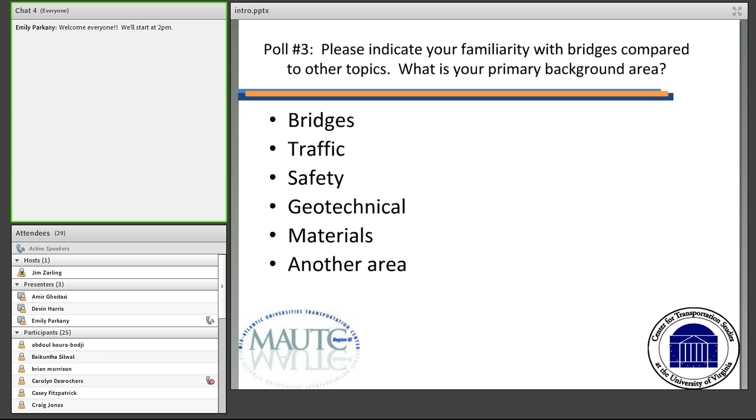And just one more poll. I am kind of curious on your familiarity with bridges compared to other topics, and sort of curious what your primary background area is, so that we get a feel for who's in the room here. Yeah, we're not quite seeing all of it.

All right, so we had to argue in our room which one to put down there. So it does look like most of us today are bridge engineers, so that's actually pretty helpful to know that people are speaking to the initiated, I guess I should say.

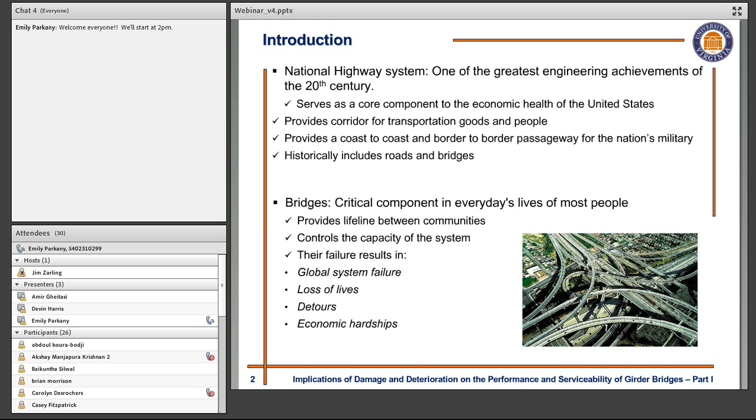In recent years, there's been a number of tragic failures that have brought bridges and the challenges associated with safety of these bridges to the national forefront of public scrutiny. Things like the I-35W collapse in Minnesota in 2007, the I-5 Skagit River Bridge collapse in 2013 from an impact, and then the M Bridge in Missouri in 2013 are some of these examples where we see these collapses, and then they make their way into the news, and people start getting concerned.

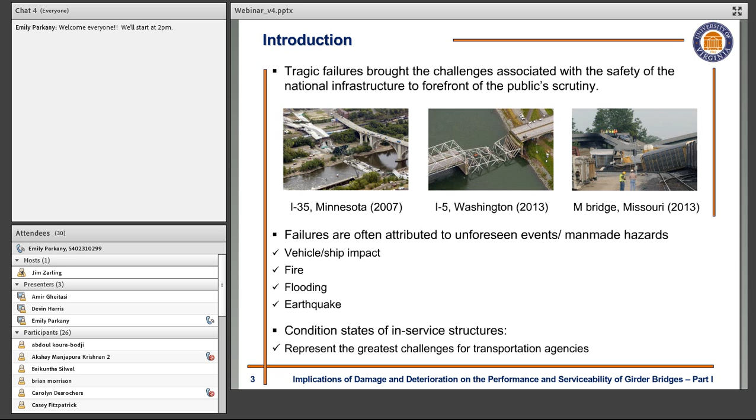The interesting thing about failures of bridges is they're often attributed to unforeseen events or man-made hazards, things like vehicle or ship impacts, fire, flooding, earthquake, and one that's really not even listed here would be something like scour. But the issue that we have in the transportation community is not really these one-off events. It's really condition states of these in-service structures. It really represents one of the greatest challenges that transportation agencies are dealing with. How do we maintain and preserve our existing infrastructure?

So according to the National Bridge Inventory, the latest database dump from 2013, we have more than 600,000 bridges in the National Bridge Inventory. This doesn't necessarily include some of the bridges that are less than 20 feet that are not part of that inventory, so it's actually even larger than that. Of this National Bridge Inventory, 10% of these are classified as structurally deficient, and 14% are classified as functionally obsolete.

In reality, these functionally obsolete ones are really more of a serviceability issue. There's low guardrails, inappropriate approach bends, things like that fall into that category. When we deal with the structurally deficient, these are the ones that really hone in on safety of the structure. And with all these structures, maintenance is a growing challenge for federal, state, and local governments. And it's really these routine structures, things like highway overpasses, short to medium span structures.

These structures suffer from various sources of in-service deterioration or degradation. And when we look at the infrastructure as a whole, transportation officials are behind in their ability to keep up with this maintenance. We're on this 2-year type cycle, and we're not ultimately able to repair everything at once. And in reality, it's not feasible to immediately repair everything anyway, both from an economic standpoint and a manpower standpoint.

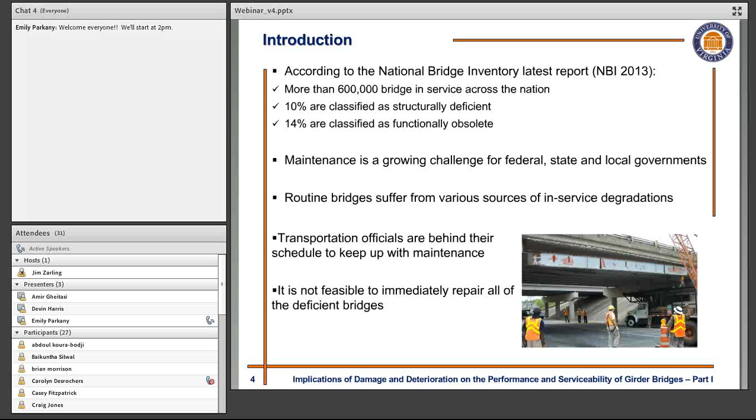So the premise of structural health monitoring has come into play, and it's been around for probably 10 to 15 years or so. This framework, structural health monitoring, is intended to evaluate the system performance. So you may have heard this four-level approach. Level 1 being detection of damage, level 2 being localization of the damage, 3 being estimation of the extent of the damage, and then 4 being the consequence of this damage. And basically this relates primarily to the structural safety and remaining life of the structure.

And as we go from level 1 to level 4, we see an increase in complexity in our ability to use this tool. And what this presentation really centers on is this level 4 part, really the consequence and the behavior of the system. As a result of structural health monitoring, there's been a number of new technologies developed to monitor in situ behavior of these structures. Things like fiber optic sensors, wireless sensors, non-contact measurements.

And what has been a challenge is that there's been some reservations with integration of structural health monitoring into standard practice. Part of this has been because of skepticism by transportation agencies for this framework. There's been issues related to the cost and the application of these technologies relative to the inventory. And one that's been presented very frequently is the potential for large amounts of data to come out of structural health monitoring frameworks.

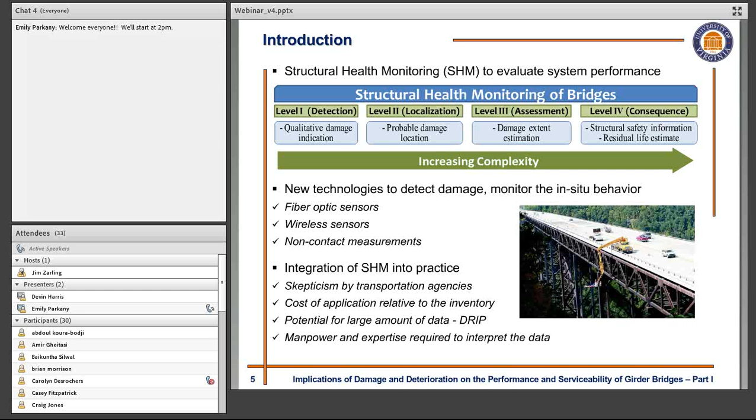And if you've heard the term DRIP, or data-rich information poor, this is kind of a common issue with structural health monitoring systems. The last one is the manpower and expertise required to interpret this data. So we're getting these large amounts of data. Ultimately, agencies do not want to have to employ a PhD in order to interpret the data sets. So we recognize that as a whole.

So before we get a little bit further on, we wanted to ask one question. What is your opinion on the concept of structural health monitoring for transportation applications? One is a tool that should be used more often. The other one is a tool that has limited application in the current environment. And three is undecided. You're undecided?

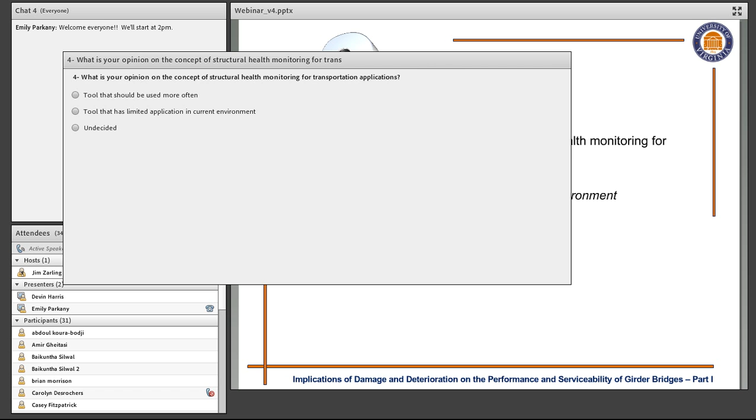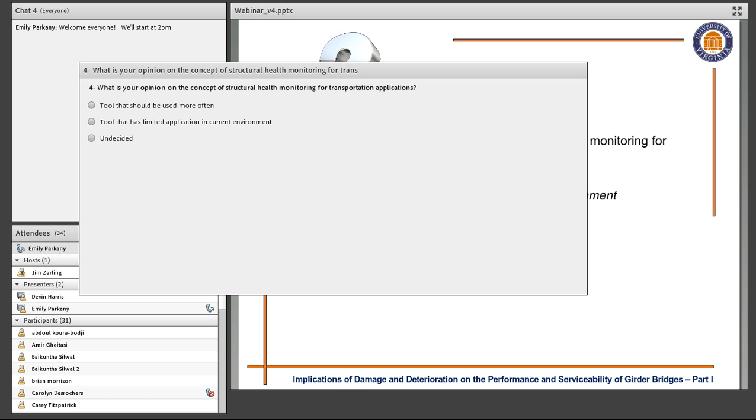All right, so it looks like we got almost a 50-30-11 split. We appreciate that feedback.

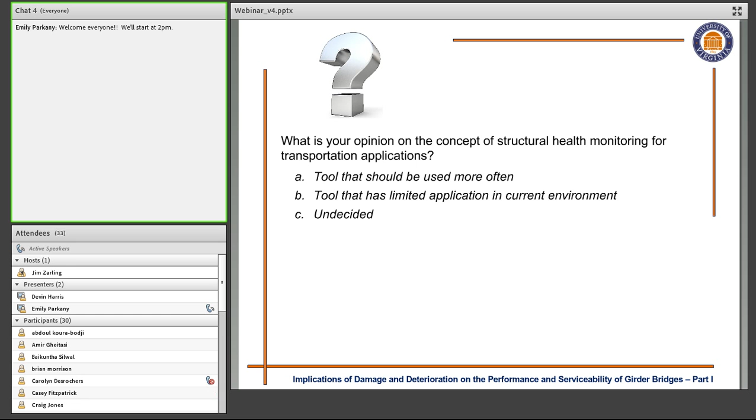So the challenge that we're addressing with this presentation is that, as I said, transportation agencies are lacking, in our opinion, a fundamental understanding of the influence of these damage mechanisms on the system performance. The question that comes out of this is how field inspection data, which is what we commonly collect, can be used to correlate the impact of existing damage scenarios on the performance of highway bridges.

So our goal in this project is ultimately to create a mechanism for integrating damage and deteriorating conditions into a measure of system performance. We're looking to make this framework applicable to routine superstructures rather than high-profile bridges like the Chesapeake Bay Bridge Tunnel, Mackinac Bridge, Golden Gate Bridge, which typically have constant ongoing maintenance. Another sub-goal would be to provide a linkage between design assumptions, maintenance, and behavior, which are typically uncoupled.

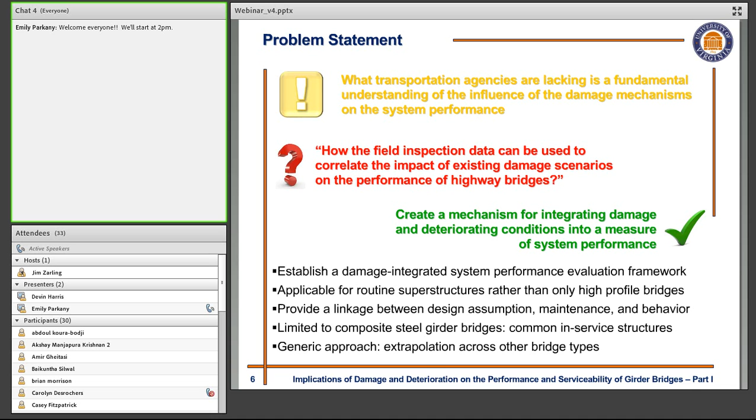In this study, we've limited it to steel girder bridges, which are one of the common types of structures that we see in service in the Commonwealth and pretty much throughout the United States. We believe that the approach is generic and should be able to be extrapolated to other types of structures fairly easily.

So the problem statement: when we're evaluating bridge system performance, we have a number of different approaches. One approach, we'll call it the ideal approach, is full-scale destructive testing of in-service structures with damage present. We could also limit this to a laboratory study where we do scale bridge models.

The challenge with these experimental approaches is that they're not really feasible in the current day and age. The primary reason is the associated costs with testing these types of structures. At the laboratory scale, there are issues associated with scaling and simulation of the actual boundary conditions and loading environment representative of an actual in-service structure.

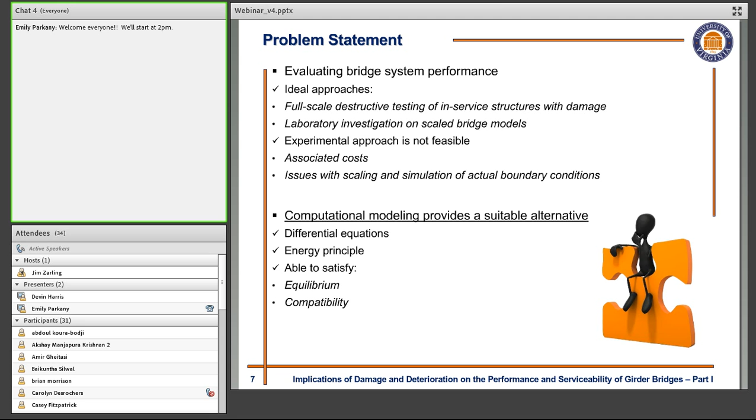That points us to a different approach, where we use computational modeling as an alternative. What we're trying to do is ultimately satisfy the differential equation of the system using energy principles and satisfy equilibrium and compatibility of the system. So computational modeling, in a nutshell, is mathematical models of the structure.

We have classical analytical models with closed form equations. These tend to be more applicable to simple structural components like beams, columns, frames, and typically are not able to represent complex structural systems like a bridge, where we have distribution behavior, composite action, and complex interactions of the various components.

In numerical models, we have an assemblage of discrete parts. It's a mathematical model in a different form, and we associate these models with approximate results. The complexity of the model is affected by the desirable level of accuracy. So if we develop really fine models, we'll tend to get better results.

Some common numerical modeling approaches, some older than others, include the grillage method, a planar grid model, frame analysis type approach, where we discretize the structure into a series of beams and transverse beams.

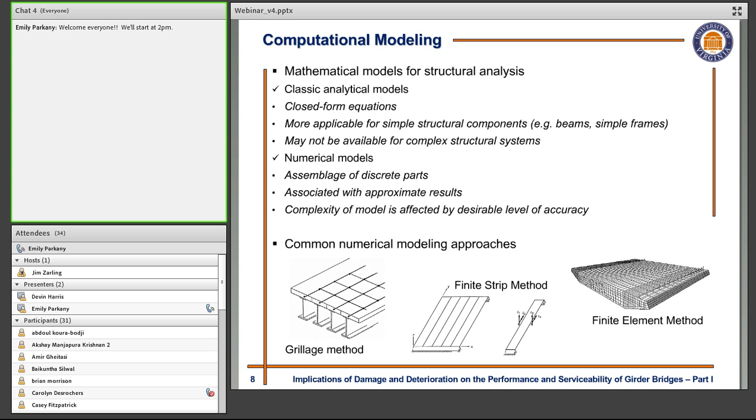Finite strip method, which is somewhat similar to the finite element method, where we're looking at a line element, and then the finite element method, which is what we're actually using in this study.

So before we continue, we're going to ask one more question here. How familiar are you with the finite element method? And answers being not familiar at all, familiar from school but no experience with application, I use this tool on an occasional basis, and I use this tool regularly.

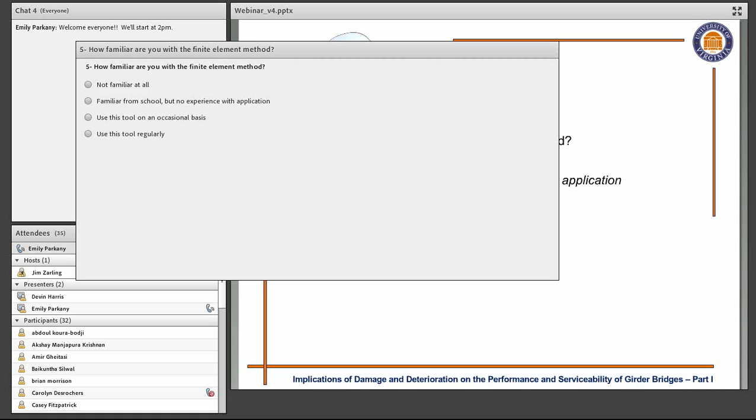That's good. That's pretty good distribution. I guess I'll go ahead and end this one. So the person, oops, okay. I guess the person who uses this regularly, we're probably going to try and hire you after this webinar. No, I'm kidding. We're going to move on.

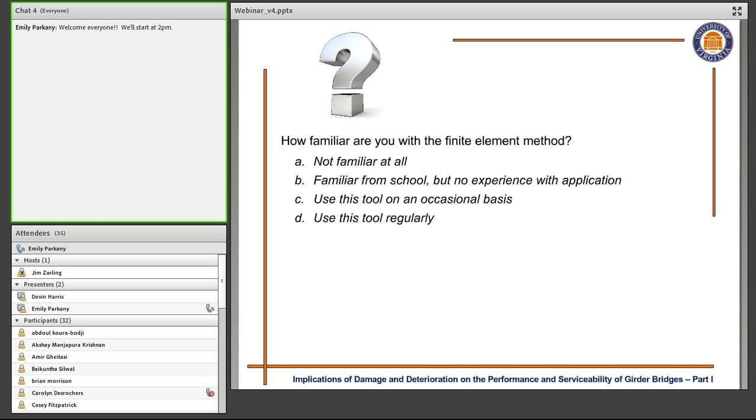Okay, so with the finite element method, for those who are not as familiar, it's a powerful tool common in engineering practice. There's a number of different packages out there. We use more of the complicated ones, ANSYS, Abaqus, which are typically commercial versions of the finite element solution. It allows us to model complex structural systems, include geometrical details, evaluate things like load structure interaction, and as it relates to this particular project, integrate existing damage.

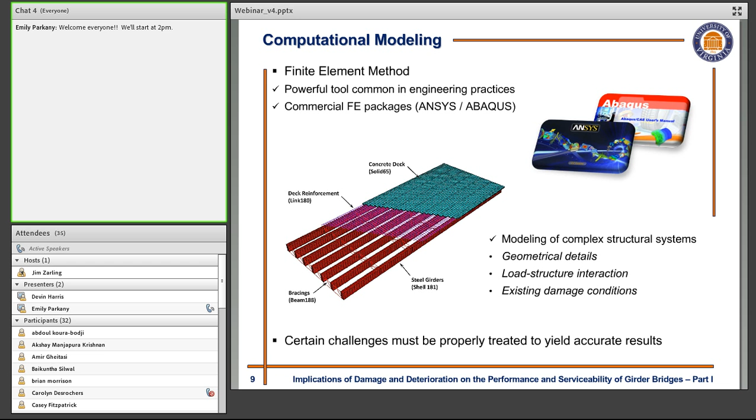And the challenge with this approach is that certain challenges must be properly treated to yield accurate results, and that's a very important thing. It's kind of the mindset of if you put garbage in, you get garbage out, and so it's actually very important that you try to model the actual phenomena that exist. So some of the modeling assumptions and simulation techniques that need to be considered have major impacts on the accuracy of results, including things like element selection, mesh generation, loading and boundary conditions are critical.

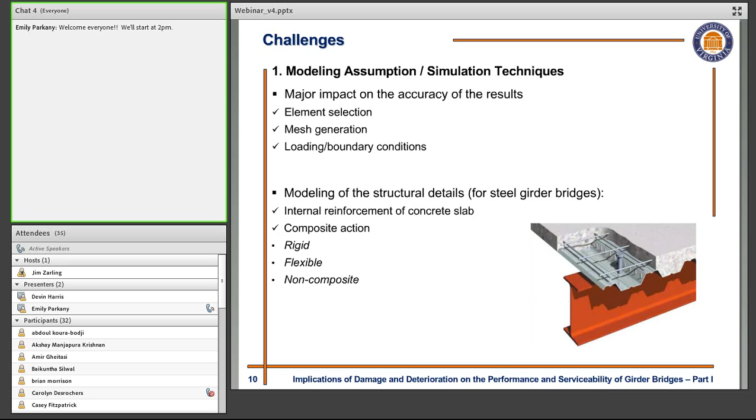For these bridge systems, we need to be careful and cognizant of modeling structural details, such as internal reinforcement of the concrete slab, composite action of the system, interaction between the deck and the girders. And then as we take these models into the full nonlinear range, which is kind of at the core of this project, it's essential to capture the failure characteristics and ultimate capacity of the system. So we need to pay attention specifically to the elastic and inelastic behavior of the materials, non-homogeneous and brittle nature of concrete, post-yielding and strain hardening of steel.

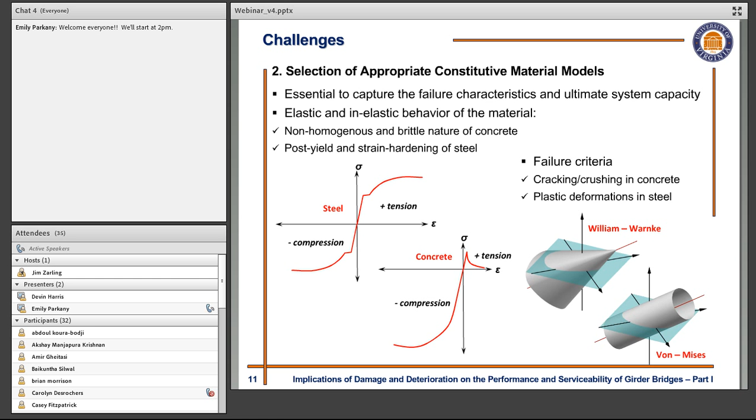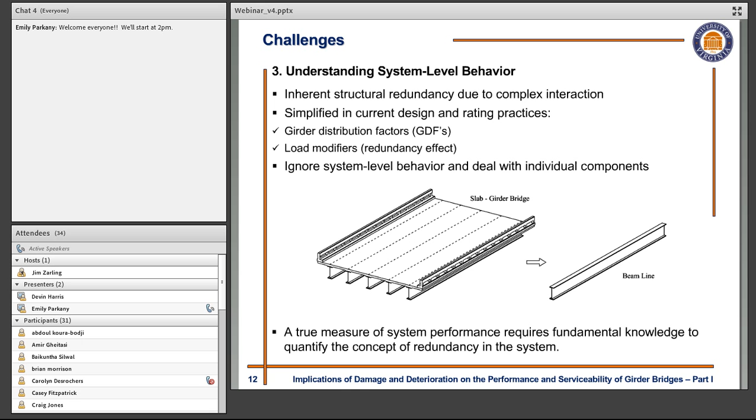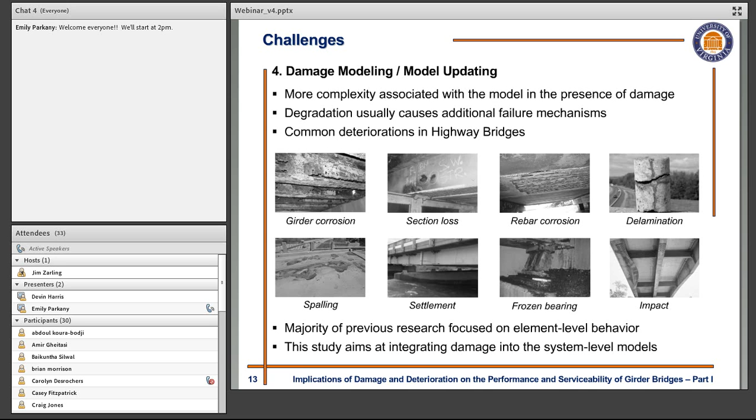A majority of the previous research on these topics has focused primarily on the element level behavior, and this study really focuses on the integration of the damage into the system level behavior of these structural systems.

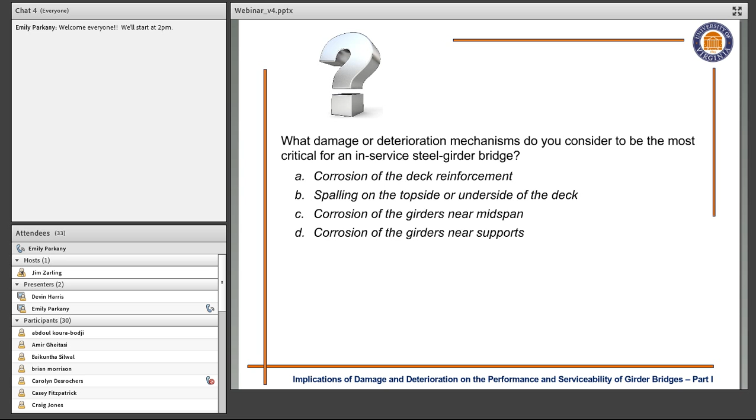So as we move forward, we have one more question for you. The question is, what damage or deterioration mechanisms do you consider to be the most critical for in-service steel girder bridges? Potential answers: corrosion of the deck reinforcement, spalling on the top side or underside of the deck, corrosion of the girders near midspan, corrosion of the girders near supports.

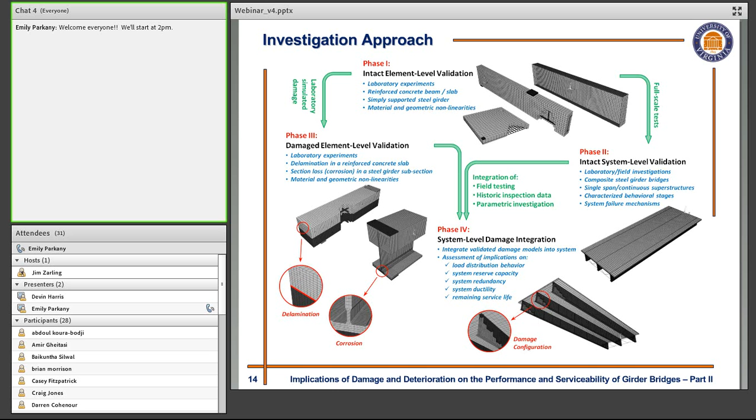For each of these phases, we have developed a series of numerical models based on the experimental data available in the literature, and we try to use that available experimental data to validate and calibrate our numerical modeling approach. So in the next couple of slides, I'm going to give you a summary of these numerical models that we have developed specifically for the first 3 phases; these are the basics of our numerical modeling framework.

So in phase 1, our focus was to understand the behavior of intact bridge components, individual components, and in the category of composite steel girder bridges, the main load carrying elements are classified as steel girders or reinforced concrete decks. So our goal in this phase was to address the first 2 challenges, including the simulation assumptions and selection of appropriate material modeling in our numerical models.

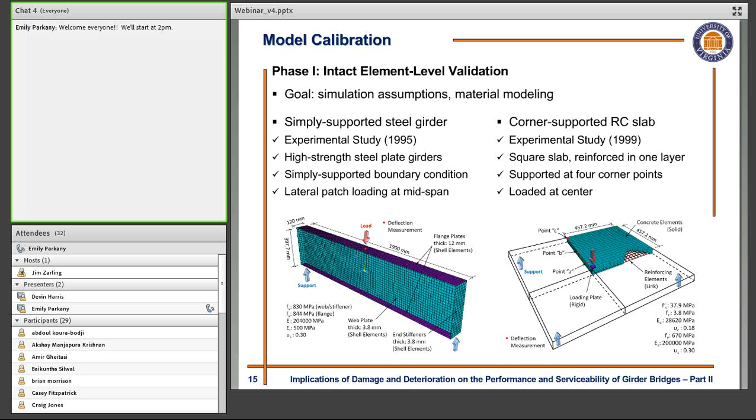On the other side, for the next specimen, we selected an experimental study performed by McNeice back in 1999 on a corner-supported 2-way reinforced concrete slab. This is the basis of much of the numerical analysis of reinforced concrete structures in deck applications. In order to take advantage of the symmetry in loading and geometry of the structure, we simulated only 1/4 of the slab in our study. And again, similar to the case of the steel plate girder, all the geometrical properties and material characteristics were extracted from the test reports.

For both of these models, we included all sources of material nonlinearity, including the nonlinear stress-strain relationship, cracking and crushing for the concrete, plasticity and strain hardening, and also appropriate failure functions for both of these materials. For the steel plate girder, we also included geometric nonlinearity to capture the local instability of these structures by introducing the initial imperfection in the form of out-of-plane deflection of the web plate and also twisting of the top flange. We performed nonlinear static analysis using the ANSYS software with Newton-Raphson as our nonlinear solver.

Other than that, the model was able to capture the failure mode of the system, which in this case was governed by the lateral buckling of the web plate under the location of application of the load.

On the other case, the reinforced concrete slab, our model was able to predict the elastic behavior up to almost 5 kilonewton of the applied loads, which is the first cracking point or first cracking load of this structure. And after that, we had the reduction in the stiffness, but there is a little bit of discrepancy between the numerical and experimental results, and that is mainly related to the fact that there is limited information on the test setup, on the test report, and also the boundary condition that we used during the test. So we made lots of assumptions in our numerical model.

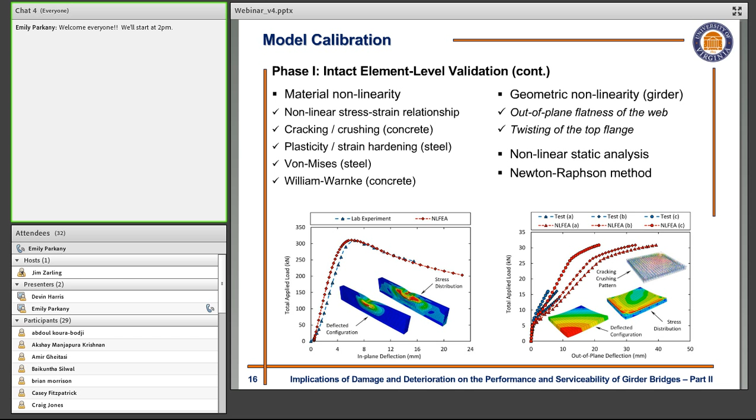Other than that, as you can see in this figure, they had a limitation on the amount of load that they put on this structure in their test setup. But in the numerical model, our model was able to capture the full nonlinear behavior of the system up to the failure of this specific slab, which was caused by a combination of material yielding in the reinforcement, cracking in the concrete deck, and crushing on the top surface of the deck.

In phase 2, our focus was to study the behavior of intact bridge superstructure. So as we validated these numerical models within phase 1, now we can combine them together and create a model of the bridge superstructure. And the goal is to understand, as I mentioned, the system-level behavior, interaction between these components, and finally the failure characteristic of these types of structures.

So for this phase, we selected 2 experimental investigations. The first one was based on an experimental study performed at the University of Nebraska back in 1995, where they modeled and constructed a model bridge, single-span, simply supported, full scale in the laboratory. And what you can see in the picture is the numerical model that we have created for this specific structure based on the data that they provided us in their report.

The second case was a 4-span continuous bridge superstructure, which was in service back in the 1970s and was tested to failure by a research group from the State of Tennessee. And again, you can see the numerical model that we have created for this structure. Both of these structures were loaded by a series of concentrated loads in the experimental program to mimic the situation of two side-by-side HS20 trucks.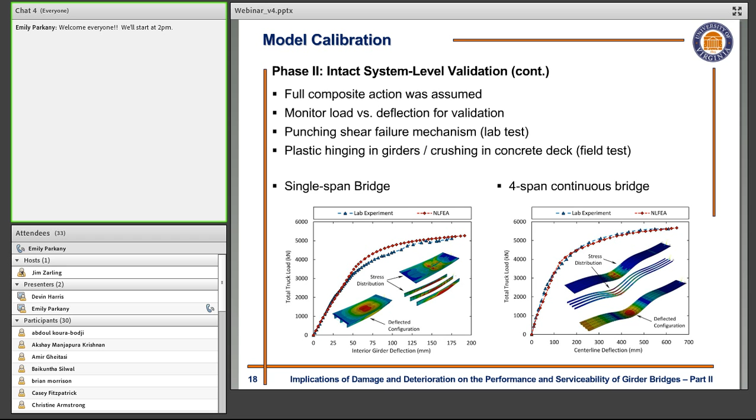In the next part of this phase, for the first time, we classified the stages to failure for these specific structures, which started with stage A, cracking in the reinforced concrete slab, followed by B, formation of the first yielding point in the girders, and then going through stage C, formation of full plastic hinges, and ultimately the ultimate capacity of the system, which was classified as stage D.

I should mention that all of these stages, the sequence and occurrence of them, are specific to these structures, and for other structures, other types of loading, other geometrical characteristics, they might be different in terms of sequence and occurrence. So we also performed a sensitivity study on one of these structures to see how the variation in geometrical and material properties will affect the occurrence of these classified stages to failure.

So that actually confirms the complex interaction between the components and the redundancy that we have in these systems. And the concept of redundancy is overly simplified in today's design practices, mainly in the format of distribution factors between the girders and also the load modifiers.

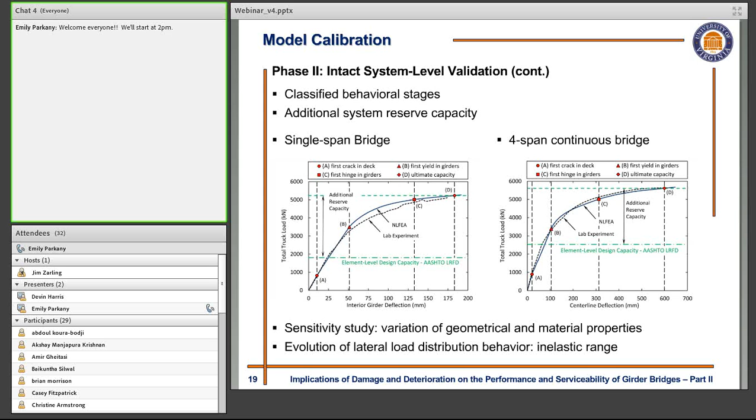So with these first two phases, we addressed the first three challenges: the simulation assumptions, the modeling of the material, and understanding the system level behavior. The last challenge that we had in this study was how to create a suitable model, an applicable model, for including the effect of damage into the behavior of these structures.

And in phase 3, we actually selected two types of damage which are believed to be the most common types of deterioration in these specific types of bridges, the composite steel girder bridges, which are girder corrosion and deck delamination. Girder corrosion usually happens at either end of the structure as a result of leaking from the expansion joint or spraying from passing vehicles underneath the structure.

The corresponding damage mechanism would be a reduction in the thickness of the web plate, bottom flange, stiffeners, and this type of damage scenario may cause the structure to reduce its ultimate capacity because of the existence of local failure mechanisms such as local buckling or web crippling or crushing of the end stiffener in the vicinity of the support.

In the other case, deck delamination or any other sources of deterioration associated with the reinforced concrete slabs, we may have delamination as a result of freeze-thaw cycles or corrosion-induced delamination. In the case of corrosion-induced delamination, we have this horizontal three-dimensional planar cracking that is parallel and close to the exterior surface of the reinforced concrete deck.

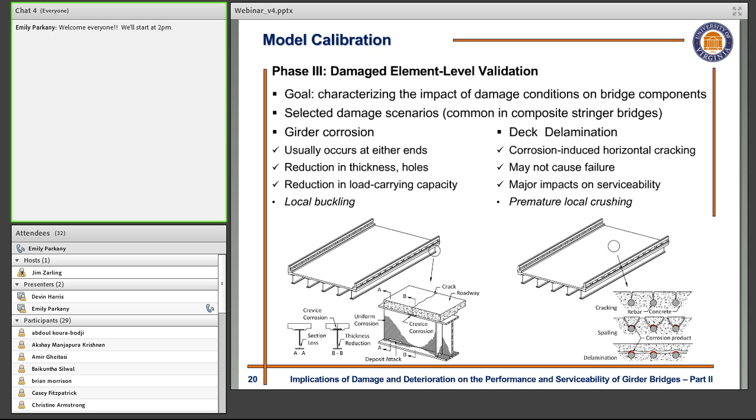So with the limitation that we had on the experimental results on full-scale tests of bridge superstructures with actually detected level of damage, we decided to select an alternative and validate this modeling strategy for damage scenarios at the element level. In order to do that, we again selected two case studies.

The first one was a series of experimental investigations on deteriorated steel sections performed at Michigan Tech back in 2005, where they had these W sections and they reduced the thickness of the bottom portion of the web and a portion of the bottom flange to simulate the effect of corrosion. And again, they had a bunch of models, and among those we selected the one that you can see in this figure. We created the numerical models based on the geometric and material properties they provided in the test report.

In the other case, we were interested to see how delamination will be causing the structure to fail or reduce the functionality of the structure. So we selected the experimental investigation performed at the University of California, San Diego on overlaid reinforced concrete slabs, and they had different slabs with different boundary conditions between these two layers and tried to understand how this boundary condition may affect the behavior of these slabs.

So among all the specimens that they had, we selected the one where they used a bond breaking agent as the lubricant material to simulate the ideal case of delamination. Again, similar to the case that we had in phase 1, in order to take advantage of the symmetry in geometry and loading, we only modeled 1/4 of this specific slab.

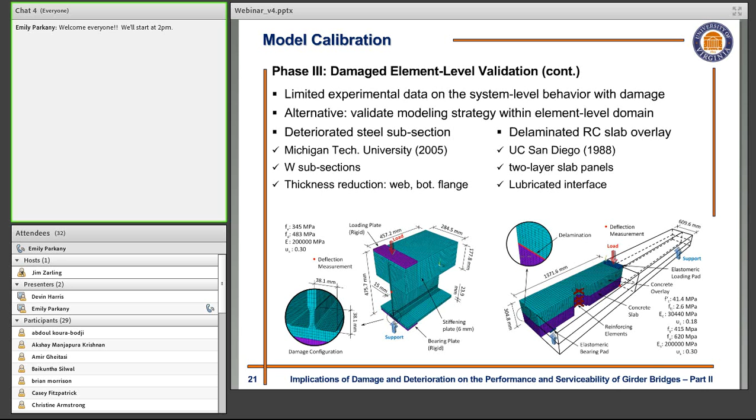In order to simulate the contact area or the interface area between these two layers, we used contact elements from ANSYS that are able to transfer the compressive stresses between these two layers, and they are free against tensile stresses. For each of these cases, we actually developed two numerical models, one with the intact configuration, the other one with the damaged configuration. We performed the same type of numerical analysis on those and tried to validate them by comparing the results from these numerical investigations to the experimental data.

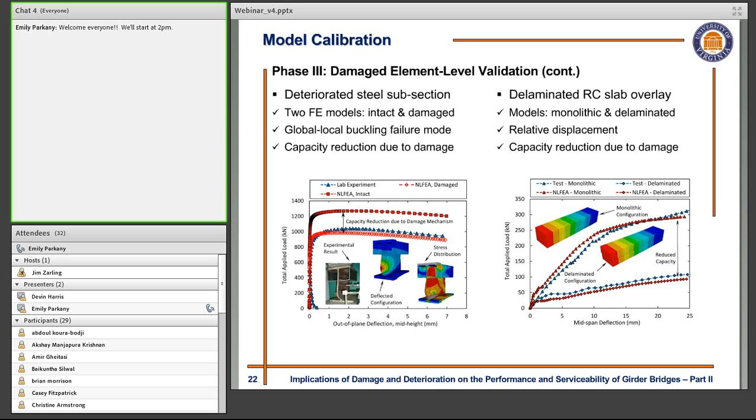In the other case, the overlaid reinforced concrete slab, we had these two models: the intact configuration where we had full bond between these two layers of concrete, and the delaminated case where we used the contact elements to make the separation between these two layers. And as you can see, the numerical models were in good agreement with the experimental data, and again, comparing the results from the intact model and damaged model, you can see the amount of reduction in the capacity as a result of the existing damage configuration.

So with all of these first three phases, we actually established a comprehensive foundation for our numerical modeling approach, and we addressed all the challenges we mentioned in the first part of this presentation. So the last part would be to evaluate the system behavior with integrated damage. The objective of this last phase of the project, which is the key role of this investigation, is to integrate the damage mechanism into system level models and characterize the impact of damage on system capacity, system ductility, and redundancy, and also the safety of this type of bridge superstructure.

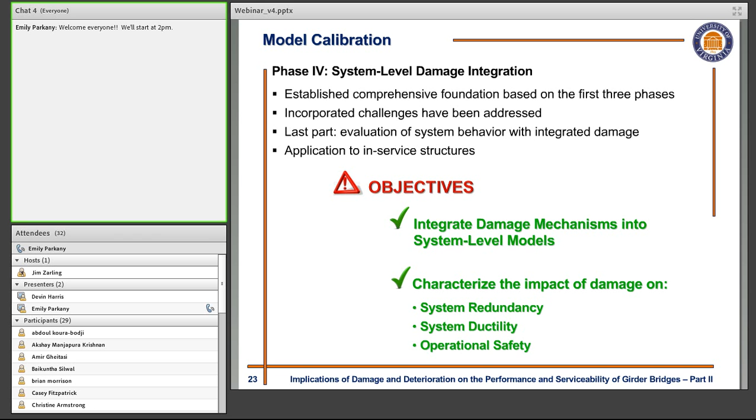So in this phase, we actually started our investigation with a little sensitivity analysis, and we updated one of the bridge models that we validated in phase 2. This was the bridge that was tested at the University of Nebraska. That was a lab test bridge, and we tried to include some representative cases of damage into the model, like delamination, corrosion in the girders, lateral deformation as a result of vehicular impact, and also fire attack. And for the values of the damage and the location, we didn't have any exact idea of these values at the time. So these damages that we put on this structure are ideal representations of the actual quantities that may be found in practice.

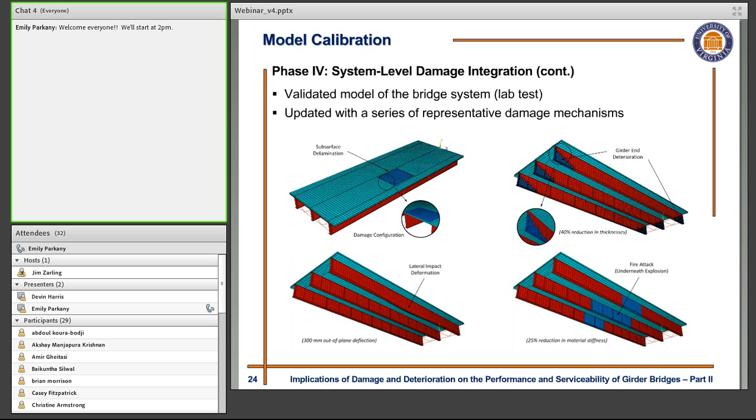So under the same loading and boundary condition, we analyze all of these damage integrated models, and we monitor the same type of response, load versus deflection at midspan of the structure, and we compare this response to the intact system. So as you can see, in all cases of damage, we have reduction in the overall capacity of the system as a result of the integrated damage mechanism.

And other than that, if you compare this reduced capacity with the nominal design capacity, you see that we also have reduction over the reserve capacity of the system. In some of the cases, we also have reduction on the ductility of the bridge superstructure, which can be defined as the ratio between the maximum deflection that the bridge can reach, and the level of deflection that the bridge experiences at the moment of first yield in the girders.

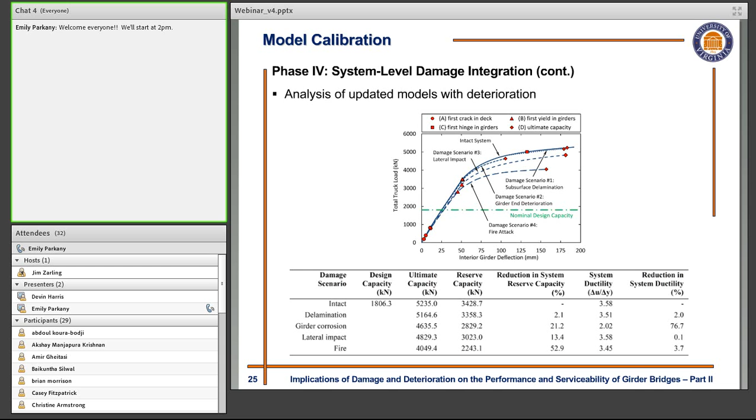Among all of these damage cases that we consider in this study, as you can see in this table, with the girder corrosion, we have the most severe effect on the system ductility, almost 76%, and with the fire attack, we had the most severe effect on the overall capacity of the system, which is almost 53%.

So with that sensitivity study, we wanted actually to expand our investigation to evaluate the behavior of actual in-service structures, and we selected Virginia as our testing bed. According to the NBI national report in 2013, almost 50% of bridges in service within the state are stringer or multi-girder bridges, and within that classification of bridges, almost 32% of those are classified as deficient. So actually, this was the motivation for us to see how these in-service structures within the state might be performing under the effect of existing deterioration.

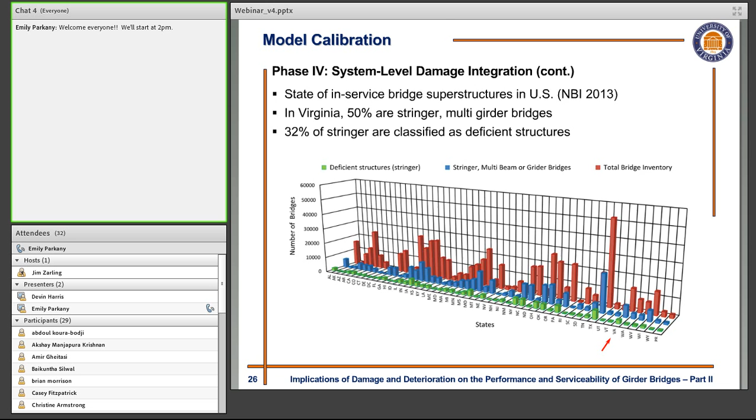So in order to do that, we decided to perform a parametric study on a couple of representative structures within the state. But we had actually two challenges at the time. The first one is how to select these representative structures. So we had access to the inventory database of the Virginia Department of Transportation, and we selected two cases, as you can see in these pictures. The Aylett Bridge and the Creek Bridge, and these structures are selected as they represent the common geometrical features of in-service structures within the state.

And both cases, as you can see, these are multi-span, simply supported structures. Regarding the cross-section, both of them are composite steel girder bridges with built-up girders or rolled-shape girders supporting a uniform thickness reinforced concrete slab. And we evaluate one span for each of these structures.

The other issue that we had at the time was to have the knowledge regarding the range of damage conditions that may occur in the state. So although we had the inspection reports for both of these structures, these are our representative cases. So we want to know how the existing range of damage within the state might affect these representative structures. So at the same time, we prepared this questionnaire or survey and passed it along to the VDOT engineers and inspectors in 9 different districts within the state and asked them to provide the average range of damage that they observe within the state.

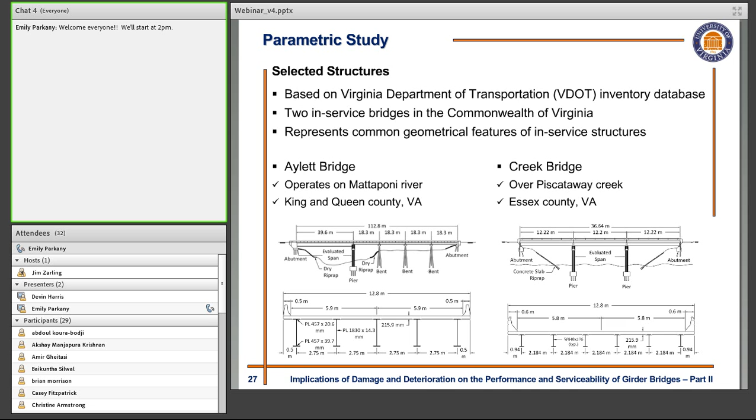As we received their responses, we realized that the most common types of damage that they observe in the state are corrosion in the girders and deterioration in the deck. So with that, we moved along with the parametric study, and started to investigate the impact of corrosion in steel girders on these specific structures. So for both of these structures, we created numerical models with the same approach, the same methodology that we used and validated in phase 2 of this project, on both the Aylett and Creek Bridge.

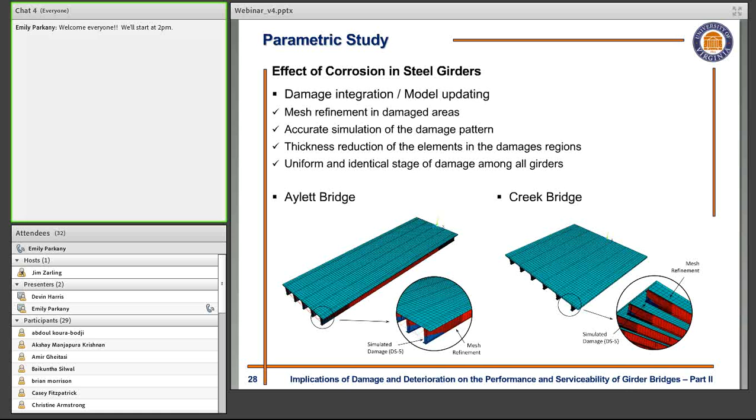In order to integrate the effect of damage, we refined the mesh generation at either end of the structure, and this mesh refinement actually allowed us to model the exact geometrical detail of the damage area. And the damage modeling was in the format of reduction in the thickness of the elements because of the existence of this corrosion. In real practice, corrosion between different girders might be different because of the environmental condition or the level of the corrosion attack. But in this case, we assume to have a uniform and identical stage of damage for all of the girders at either end of these simulated bridge superstructures.

Regarding the damage scenarios, as I mentioned before, we prepared this questionnaire and we asked the engineers to provide us the minimum, maximum, and average level of observed deterioration within the state.

So as we got the responses from this questionnaire, we ended up having these 9 representative cases, and we tried to include the variations over shape, depth, and extent level. So as you can see in this figure, the first 3 cases represent the damage scenario where we have a rectangular shape of the corroded area. In the second 3 cases, we have triangular shape, and in the last 3 cases, we have trapezoidal shape.

As we go from the left to right side, we have more expanded area of the damage because these dimensions of the damage are related to the dimension of the member. And also, again, from left to right, we have more depth of the damage, from 5% reduction in the thickness to 20% to 50%.

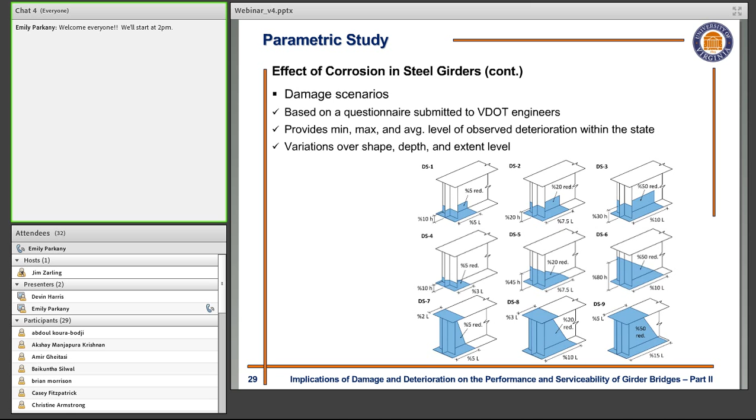Regarding the analysis, we performed the same type of analysis. Regarding boundary condition, we applied simply supported boundary condition for both of these structures as they're reported in their as-built plans and also design plans. Regarding the loading configuration, we considered flexural loading and shear loading scenarios where we put the truck loading at the middle span of the structure and also close to the supports.

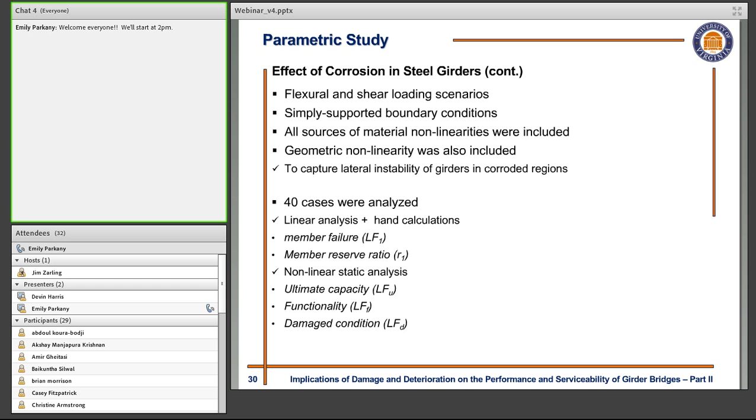Regarding the material nonlinearities, we included all sorts of material nonlinearities in the models, and all the assumptions regarding the modeling of the details of these structures are very similar to the one that we validated in phase 2 of this investigation. And then in this specific case, as we have degraded girders, there would be a potential for lateral buckling and local instability for the girders. So we also included the geometric nonlinearities into our model. So we ended up having 40 cases of analysis for both of these structures.

And the main goal of this phase, or this parametric study, was to understand how these assumed types of damage will affect the safety of the system. So if you recall from phase 2 of this investigation, we argued that in this type of structures, girder type bridge superstructures, we have a significant amount of reserve capacity, which is attributed to the fact that we have a high level of redundancy in the system, and that additional reserve capacity actually gives us a margin of safety.

So we can argue now that the level of safety in a bridge superstructure has a direct correlation with the system redundancy. And according to the literature, we have several definitions for redundancy, and the most famous one is that redundancy is the capability of the system to sustain traffic loads after damage occurred to one of its members. But most of these definitions are qualitative, and in our study we needed to come up with a quantitative measure of redundancy to see how this damage condition may affect the safety of the system.

So in order to do that, we implemented the analytical approach that was first proposed by Ghosn et al. in an NCHRP report. They call this approach a direct analysis approach to define the value of redundancy in the structures. And they argued that the structure can be considered safe if it is safe against the first member failure, the structure does not reach its ultimate capacity under the traffic loading, does not produce large deformations, and finally should be able to carry some traffic loads after damage occurred to one of its members.

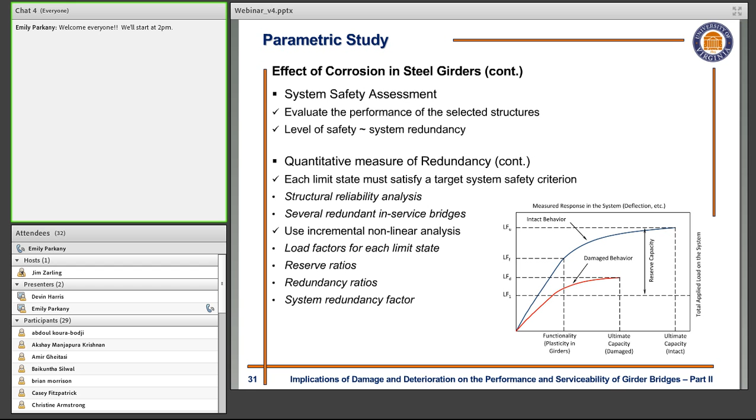So comparing the loads according to each of these limit states that we define from the numerical analysis to those target values, we'll have the reserve ratios, redundancy ratios, and comparing these redundancy ratios with the reserve ratio of each of the members of the structure, we'll have the redundancy factor of the system, which gives us the idea of the level of safety of the structure under the effect of any type of simulated damage.

So we performed the analysis and followed the same procedure that they proposed for defining the values of redundancy factors. And these are the representative results that we had for one of the structures for both flexural and shear loading scenarios. Between all of these numbers, I would like to have your attention on the boxes for the shear loading scenario. So we have 3 boxes. The first box actually refers to these 3 cases, referring to the case that we have rectangular shape of damage.

The second 3 cases refer to the case where we have a triangular shape for the damage, and the last 3 cases are trapezoidal. So as you can see, for each of these categories, as we go from case 1 to 3, case 4 to 6, and 7 to 9, we have more reduction in the capacity of the system as we increase the intensity of the damage.

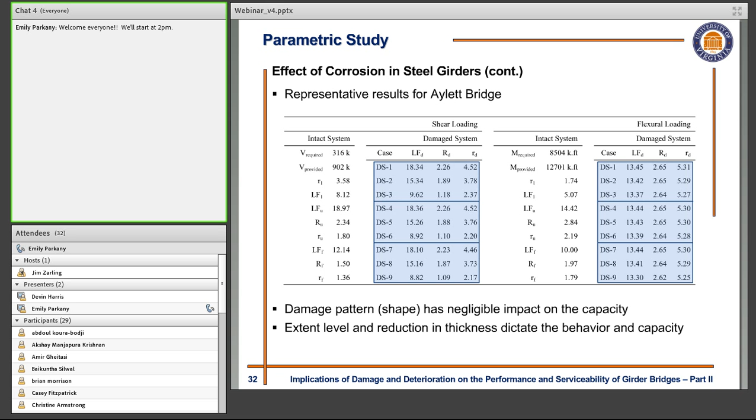But if you compare these boxes together, you can see that the shape of the damage does not have a major impact on the values that we have. So we can argue here that the shape of the damage or corrosion does not have a major impact on the capacity of the system, but it is the extent level and reduction in the thickness that may dictate the behavior and capacity of these types of in-service structures.

We performed the same type of analysis for other structures, Creek bridge, and we realized that in addition to the loading scenario and also the damage cases, the geometry of the structure itself may have significant impact on the level of safety that a structure can provide under the different simulated types of damage conditions.

And at the end, we defined the redundancy factor for both of these systems for shear loading and flexural loading scenarios. And as you can see in this table, all of these values are larger than 1. So it means that these selected structures under the selected range of damage are safe to operate. But if in any case you receive values lower than 1, we need to stop the operation of that specific structure.

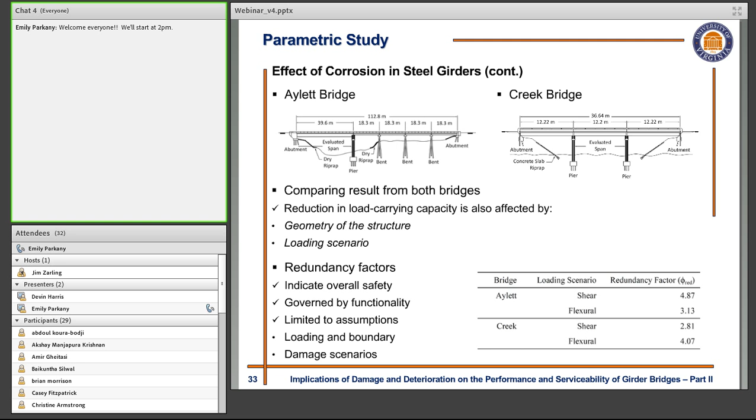We need to perform an appropriate maintenance program and check these redundancy factors again to see if we get a value higher than 1, and at that time the structure is ready to get back to service. This is actually the core of the investigation that we performed to understand the effect of corrosion in steel girders on the serviceability and safety of in-service structures.

In the second part of this parametric study, we try to understand the effect of corrosion in rebars and subsequent delamination in reinforced concrete slabs on the behavior of these types of structures. As opposed to the previous case, where we included the existence of damage in a pretty simple way by refining the mesh and reducing the thickness, modeling the effect of corrosion in the rebars and consequential effects such as delamination is pretty complicated, mainly because of the details associated with these damage mechanisms, and sometimes we need very detailed modification of the material and geometrical properties within the damage area.

In nature, generally, delamination can occur at any location over the surface of the slab. It is not like the corrosion in the girders that may occur at the mid-span or specifically at the end of the span of the bridge superstructure, and it is usually detected in inspection programs as a percentage of the total area of the deck surface.

Within the corrosion, reinforcement can experience corrosion from one side, and the corrosion can propagate all the way around to the other side of the reinforcement. So the fracture plane within the deck can occur at the upper surface, lower surface, or both surfaces of these corroded rebars. So this is the other detail that we need to include in our model. Delamination can occur as a result of corrosion in the upper layer of reinforcement or lower layer of reinforcement.

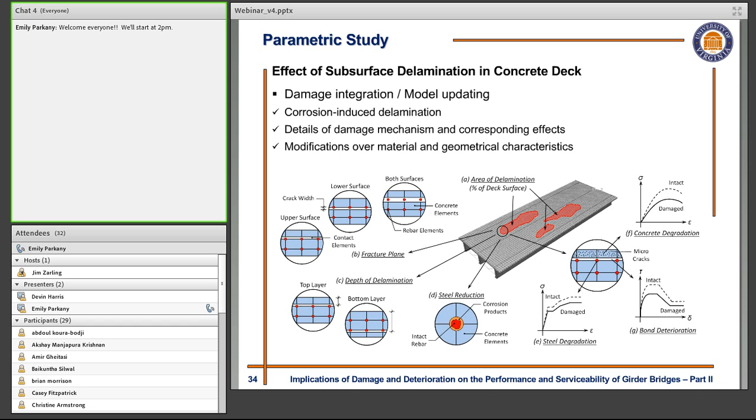And the last feature is the bond behavior between the reinforcement and the surrounding concrete, which can vary from perfect bond to ideal debonding, and this ideal debonding would be the lower bound of the behavior of the system under the effect of delamination.

So in order to understand the behavior of the system under the effect of delamination and corrosion of the rebars, we updated one of the bridge models that we had, the Aylett bridge, with 6 representative cases that, again, we selected based on the responses we got back from the VDOT engineers. And as you can see in these figures, we selected 3 levels of propagation from 5% to 10% to 15%.

And for each of these levels of propagation, we selected to have 2 different patterns, the concentrated pattern and the scattered pattern. And within these 2 patterns, we actually included the random nature of delamination into our analysis. Regarding the modeling, we assume to have delamination occur as a result of uniform corrosion in the top layer of reinforcement. So as a result, we didn't consider any degradation in the steel material.

We assume to have 30% reduction in the concrete cover at the location of delamination, uniform crack width of less than 1 millimeter. We assume to have the upper surface fracture plane for all of these cases, and finally the ideal case of debonding in all of the simulated models.

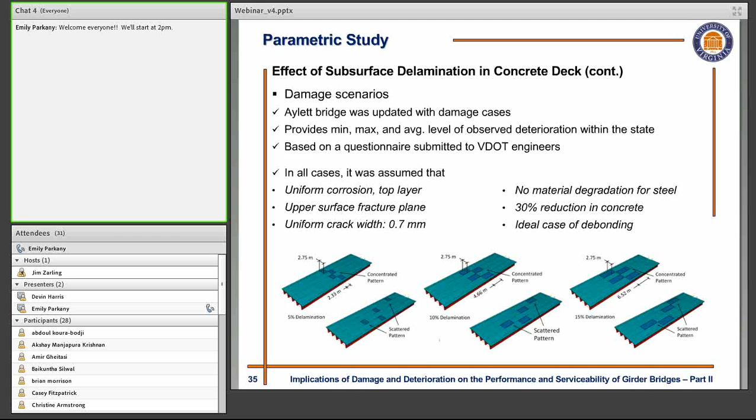In the analysis regarding the boundary conditions, we assume to have the same simply supported boundary conditions according to the as-built plan and design plans. For the loading scenario, we only include the flexural loading, mainly because of the location of these delaminated regions. The flexural loading will cause the worst case scenario with respect to the effect on the ultimate capacity and also ductility of the system.

So we apply the load, perform the same type of analysis, and we monitor load versus deflection at midspan of the structure and compare the result for all of these 6 damage models to the intact model, which you can see in the blue lines in the following graph. What you can see is that generally delamination does not have major impact on the overall behavior of the system. It doesn't have major impact on the evolution of material nonlinearity, including the cracking in the reinforced concrete deck and yielding in steel girders.

Other than that, you can see for all cases, we were almost able to capture the same level of ultimate capacity for the system. So there's no major change on the reserve capacity of this system over the nominal design capacity. So with no change on the reserve capacity, it means that delamination does not have major impact on the redundancy, and as a result, we can say delamination itself does not have a major impact on the level of safety of the structure.

But as you take a look at this figure, all of these red dashed lines, we have the reduced ductility in the system, and this reduced ductility is mainly attributed to the fact that because of delamination, we lost composite action between the layers of the concrete. And this loss of composite action helped the compressive stresses to increase significantly at the top surface of the concrete and cause premature crushing, specifically at the margins of the delaminated areas.

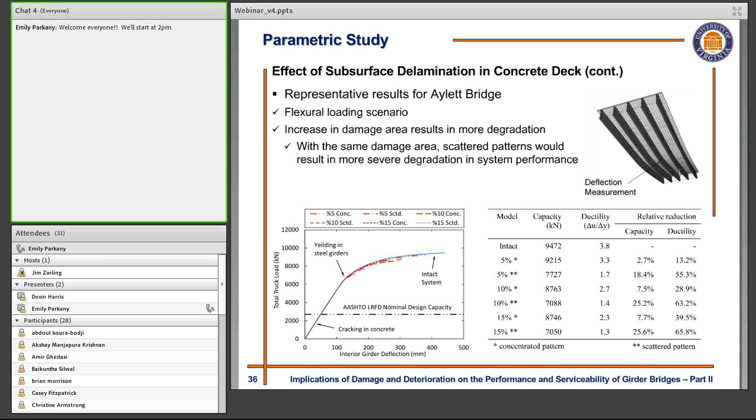In summary, the overall objective of this research project was to establish a framework to evaluate the behavior of in-service structures under the effect of different types of deterioration. This investigation that we performed so far is limited to composite steel girder bridges, as they are believed to be one of the most common types of structures in service, and we studied the influence of corrosion in steel girders and delamination in the reinforced concrete decks, but the idea and the framework is generic and can be applied to any other type of structures.

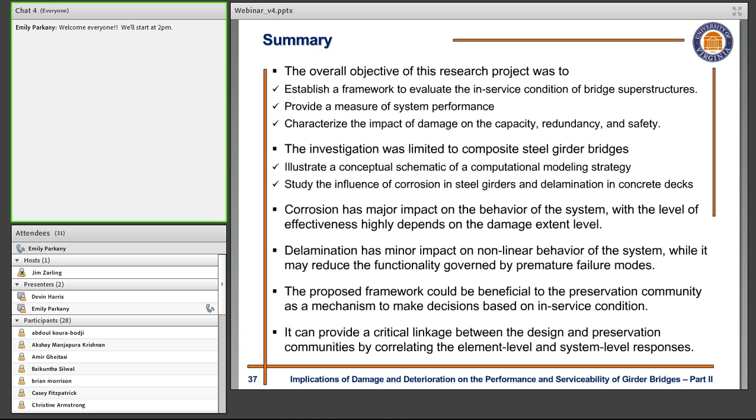Upon analysis and parametric study, specifically in the last part of this investigation, we realized that corrosion has major impact on the behavior of the system, and the level of this impact highly depends on the damage extent level. Delamination has minor impact on the nonlinear behavior, while it may reduce the functionality of the system because of local crushing failures. The proposed framework could be beneficial for the preservation community, as it can support them within their decision-making processes, and also can provide the linkage between design and preservation communities, which are not really connected in today's practices.

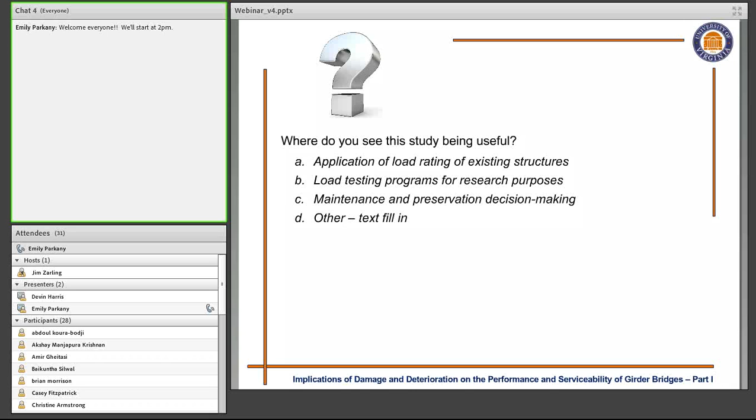So before we go and talk about the future potential research, I would like to ask you about this question. Where do you see this study being useful? A, application of load rating of existing structures. B, load testing programs for research purposes. C, maintenance and preservation decision making. And other ideas, if you have them, we would be happy to hear your ideas on other potential applications of this framework. You're more than welcome to fill in your answer in the chat box or correspond with us through email.

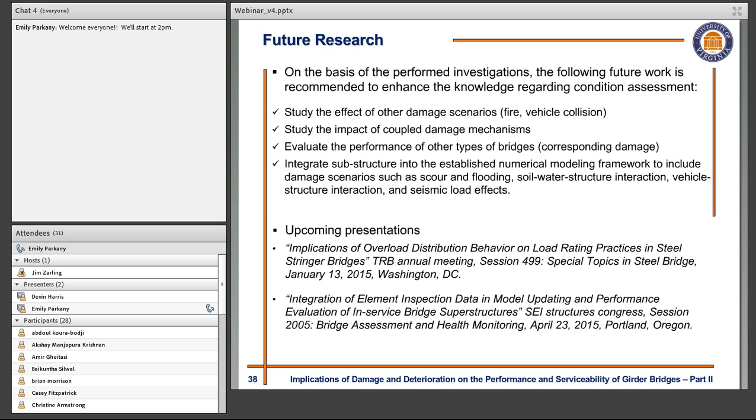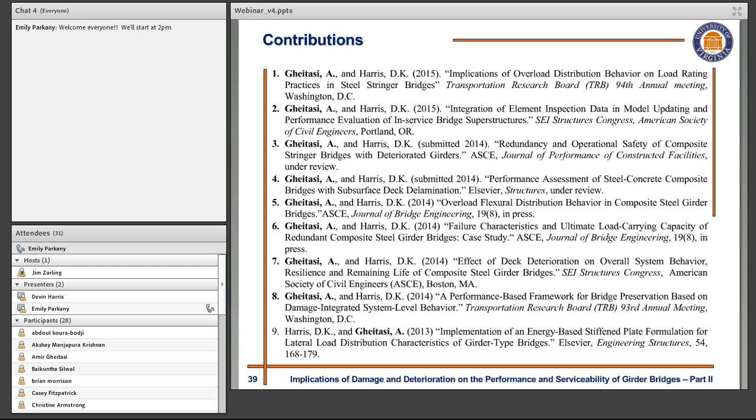Well, thank you very much for your attention. This is the list of papers that we have published and presented in several conferences and journals. Most of them have been published, and we still have a couple more papers under the review process, and we look forward to having the reviews back by the end of this year.

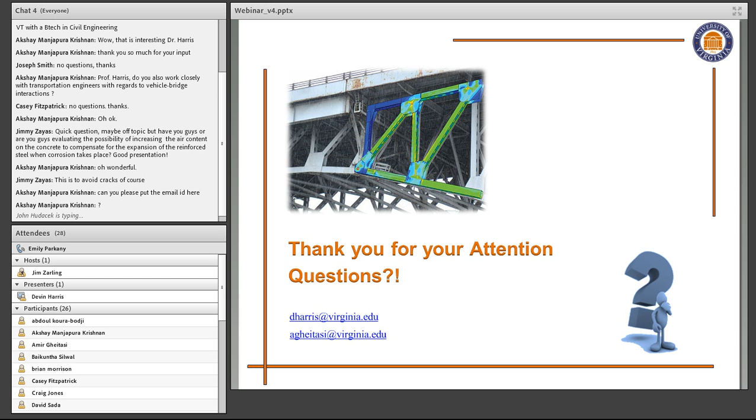So they were talking about adding the air to avoid cracks, right? Right. Yeah, that was more of a comment than it was related to the first question.